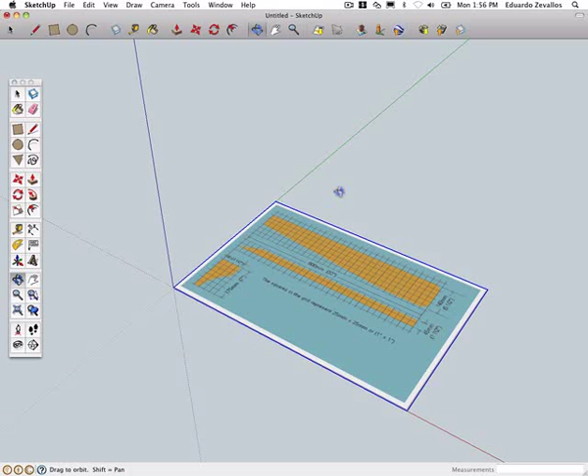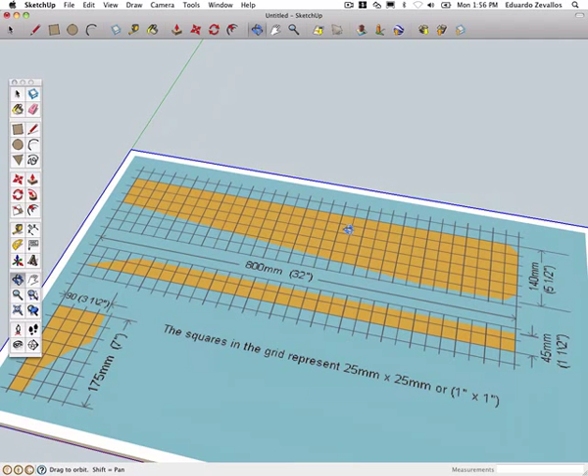Back to another fun and exciting benchmark here at SCIS Middle School, Design Technology, and we are looking at benchmark 3, part H and F, or the arm and the arm supports. Here's the arm, and here's the support. So now, if you look at this, this is just the top-down look of the arm, and here is the side look of the arm.

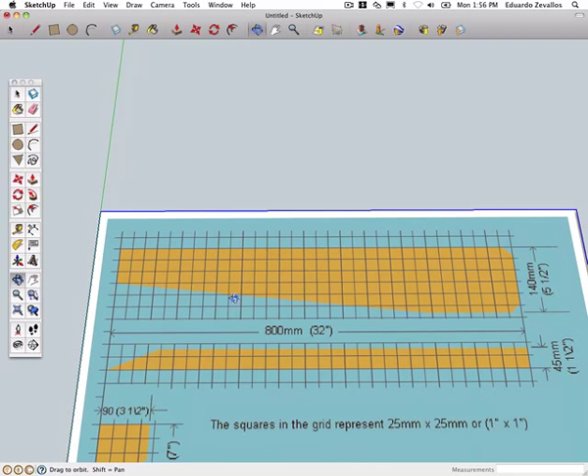I think it's important for us to model this after the top-down, and the first thing we're going to do is to size this correctly. If you recall from the small discrepancies that we encountered in previous benchmarks, we want to be able to resize this model according to which the length or the width needs to be more accurate. Sophie, the length, correct. So I'm going to use my tape measure tool, scroll down here to about this point until it's about right there in the center.

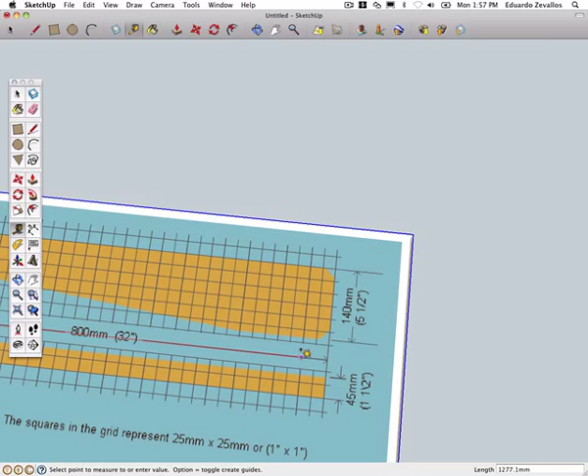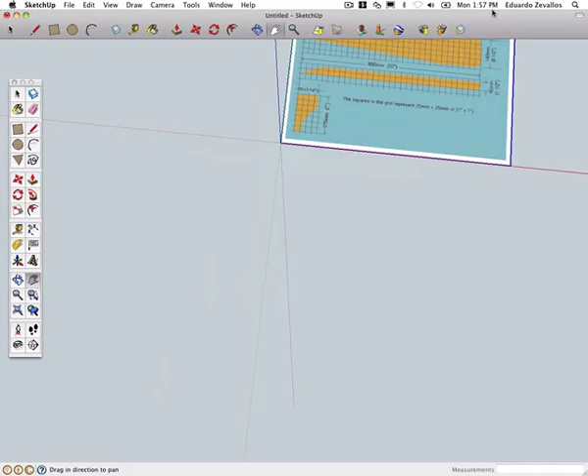Click once, and I'm going to move this all the way over here to this point, scroll in, about into the center, click, and it's going to ask me which value I want to resize to, and the value is 800 millimeters, and press enter. Do you want to resize the model? Yes, we want to resize that model. Very good. Now, take a look here. That model is now resized, and we are ready to begin.

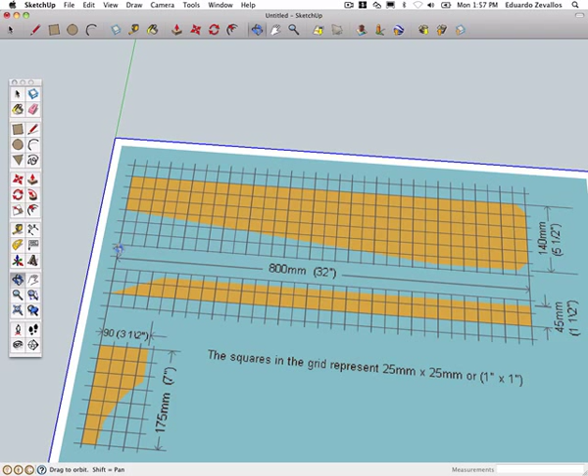Like I said before, we probably want to start here, but before we start this process, I want to go ahead and change my axis. Who can tell me, where should my axis be placed? Carl! Right there, like down. Here? Yeah, that's a place we can put one. Where else? Like the opposite one. Here? Yeah. I honestly think this is a better place, only because it allows us to really use the straight lines here for this point, whereas this one kind of curves straight out. So I'm going to make my axis, zoom in on this area.

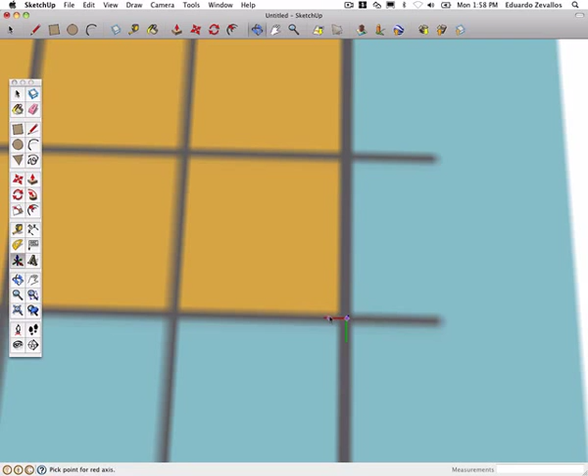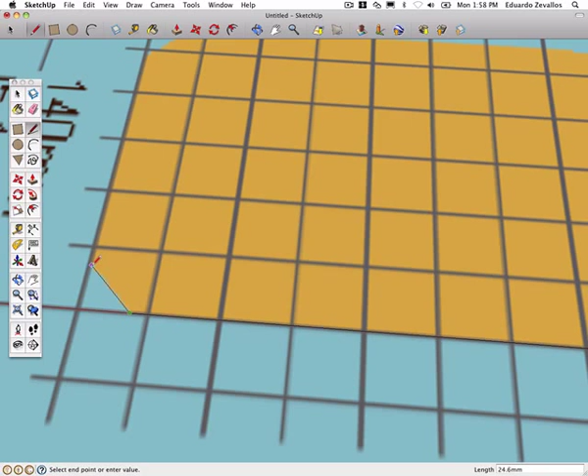Click once, draw my red. Actually, I don't really like that point for the axis because I want to get it into a nice sort of, here we go. That's about right. So put my red, put my green, and my blue comes up pretty nicely. That looks pretty decent, if I may say so myself. And now we start the process of building. Snap, snap-a-roo. See, that follows a beautiful green axis.

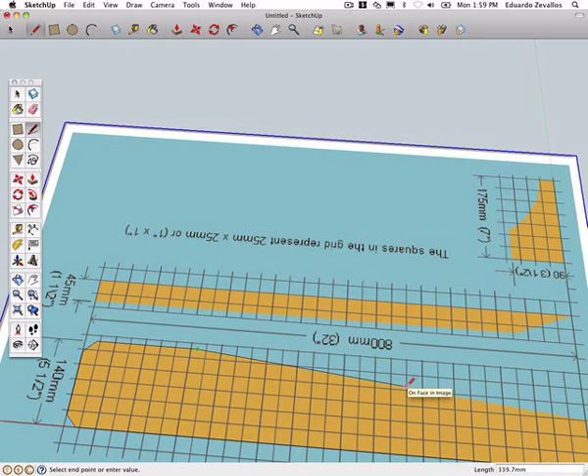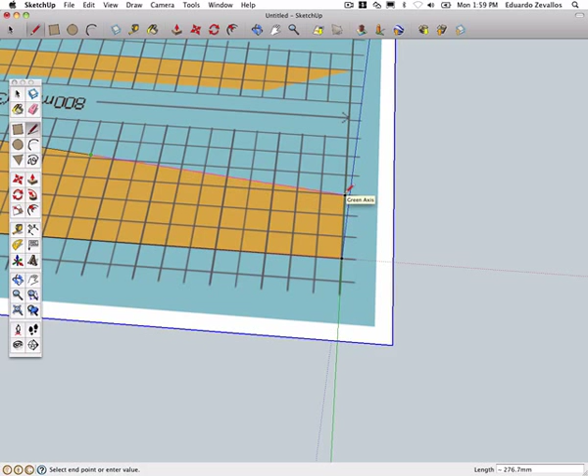Boom. Now this looks like it curves slightly, doesn't it? But I think it's better if we just stick to sort of tangential lines here. Like here. And it finishes off pretty nicely, I think. And I'm just going to hover over this to infer that line. See? Never want to leave anything up to chance. And there we have it.

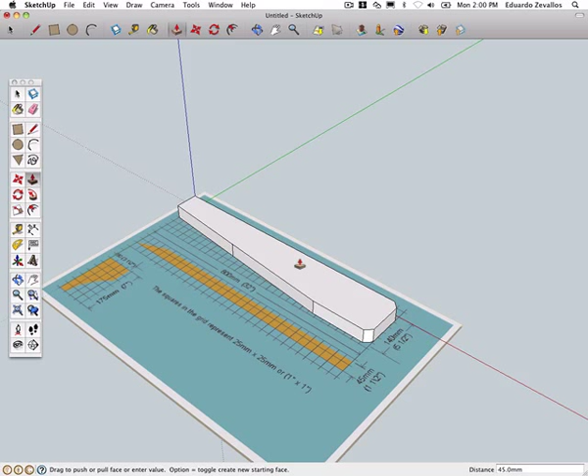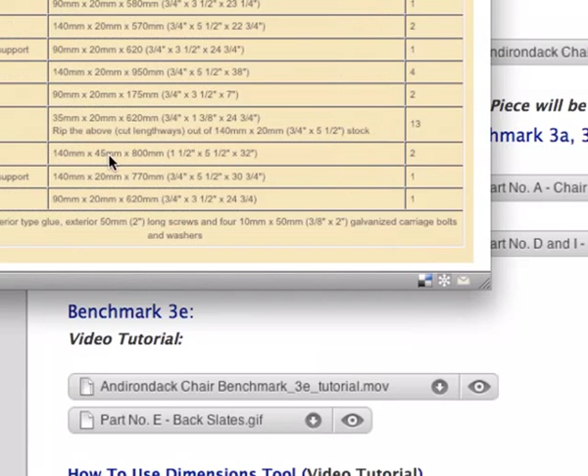Now, this has to raise, if you look at this side view, 44 millimeters up, 45 millimeters. That is a pretty thick arm. Are we right on this? I think it might not be very flat. I think it's the width. Yeah, I think it's the width. Are we right here? I don't know. Won't it say on the... It should, yes, you're right. When all else fails, let's go back to our measurements. And the arm says 45 millimeters in height. Yeah, that's a pretty big arm, if you ask me.

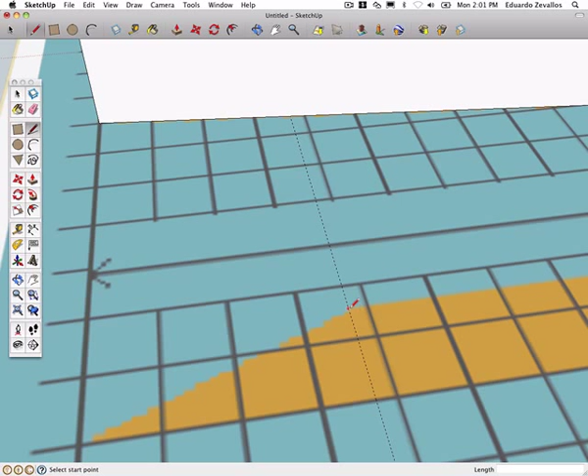But now we can see that we need to cut out a groove here about this line, and we'll measure it from the point here. In fact, what we can do is just draw a quick little, actually, I think the measuring tape is a good idea. I'm just going to measure it from here to this point there, then take my pencil, let it snap on this line, where are you? Or maybe that's not a good idea. Maybe snap it here to there, and there to there, and that length is about 100 millimeters. See? 100 millimeters.

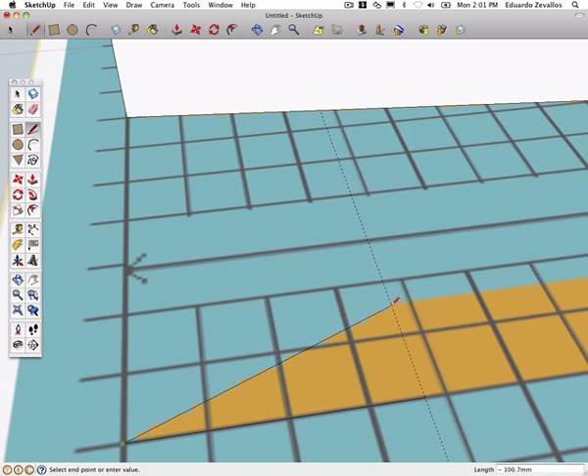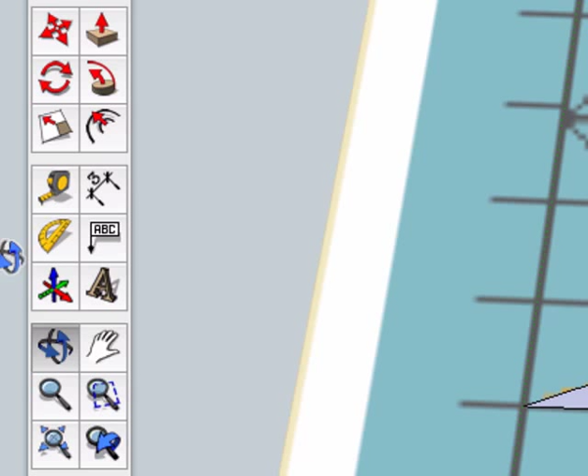But we also have to consider the angle here. What is the angle? And how can we find that angle? What tool do you need in your tools here to find the angle? The what? That's close. It does have sort of a protractor, but you're looking for the actual protractor. Do you guys even use protractors anymore? Where is it? Scale? Tape? Ah, the old trusty protractor.

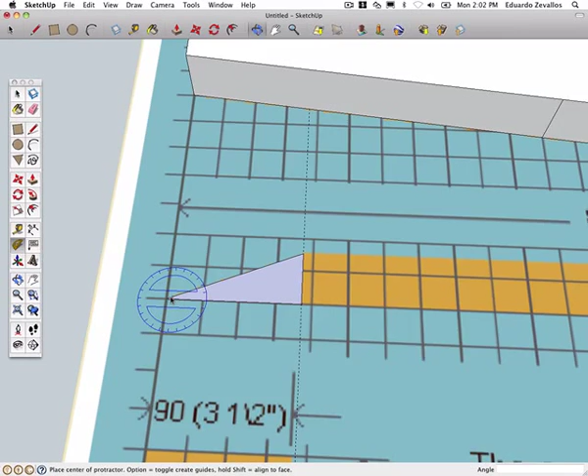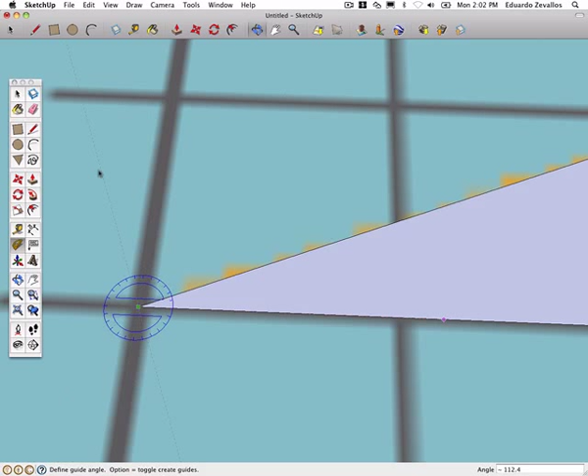Click on Mr. Protractor. Click once to anchor that point. Click one more, and we're going to raise that protractor until it tells us it is about 22.5 degrees. It could potentially be many more degrees, but this is 22.5 degrees. So, knowing that information, let us go back over here. Start from this point here.

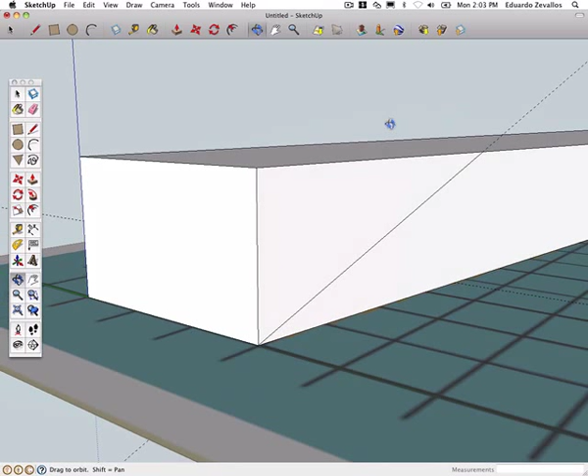Protractor. Click to anchor. One, raise 22.5. Enter. Did someone say Monet? Now, that's just a protractor line. Doesn't affect anything, but if I click using my pencil there, follow that to the intersection point there, and I draw a fine line right around here, and I can then push-pull that out.

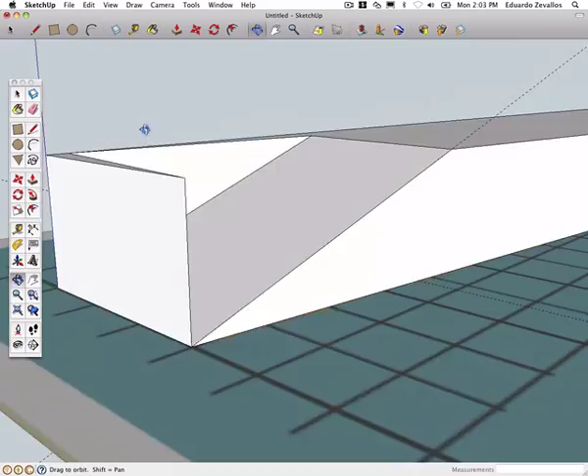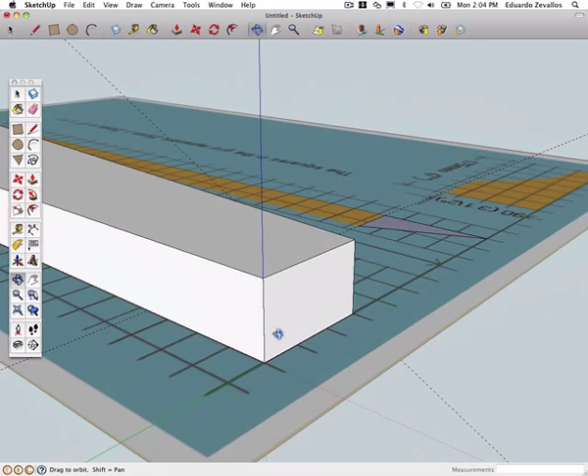But look what happens. Does anyone know why this happens? Because you're on the wrong side. Yeah, that's one reason, I could have done it on the wrong side, but why else? I think if I was to do it on the other side, I might have gotten a similar problem as well. Yes? It's not a complete square anymore. If you remember, we cut this at an angle now. So even at this angle, it may not come out the way we want it to come out. So let's try the other side, like Kai was saying, and see if that will make a difference, or if we run into a similar problem.

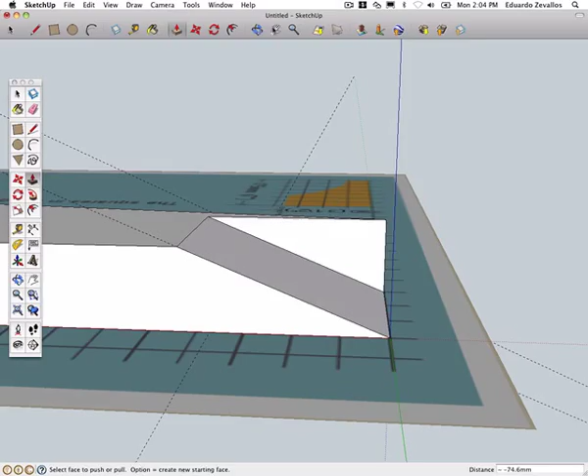Let's go here. Click, click, and 22.5. Let's draw the line there to the intersection and push-pull this out. But you see, again, we don't get that perfect sort of thing. So we have to be smart about this. How are we going to be smart about it? What do you think we need to do? Suggestions.

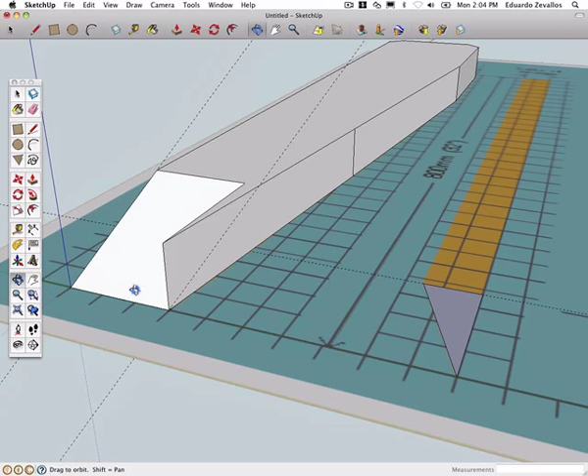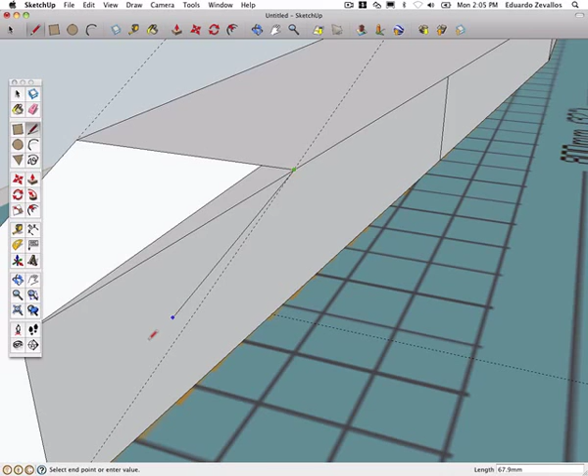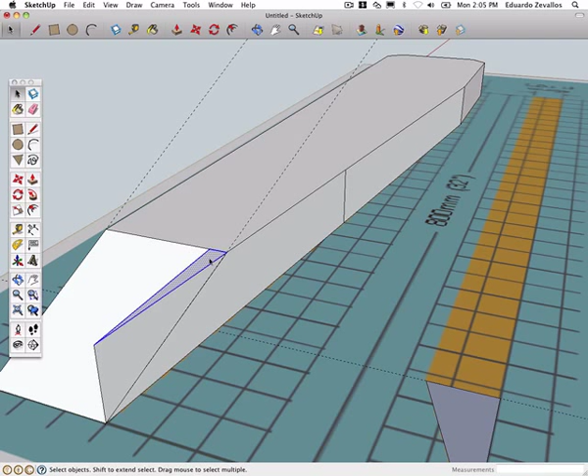We can try to finish this. But that doesn't really work so well, does it? We can try cutting it out. That's right. Selecting individual faces. But then look what happens there. You erase the top portion. Right. We can do that. No, but you know what? Not a big deal, because essentially, what's missing here? That line, right? Very good, Daniel-san. Very good.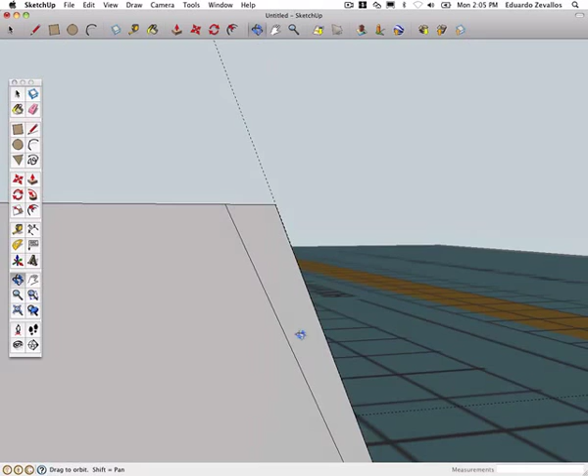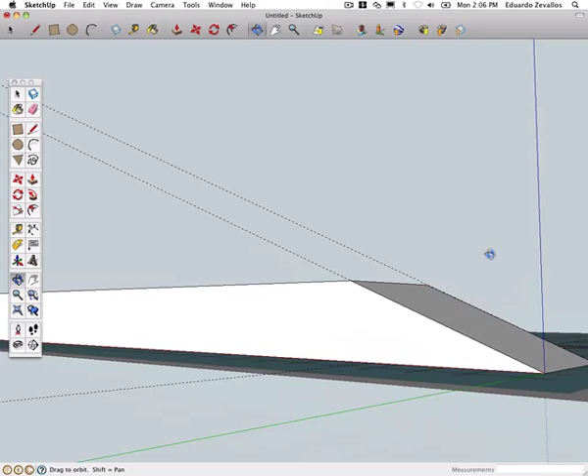Just remember back from that old video that we saw before that talked about what you need in order to create a shape. You need to complete. What we did here is that we healed, H-E-A-L-E-D, healed this object because we had taken away one line, but then we healed it again. You guys get it? Healing? Anyway, there we have it. We have our arm and we're ready to go. And all we got to do now is create the strut or this support.

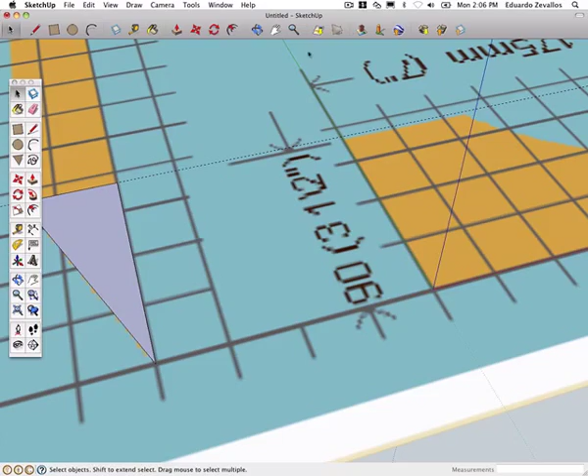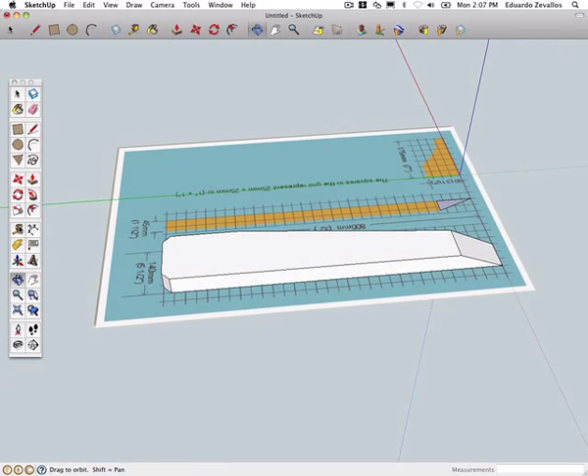Again, I probably want to take my line and turn it the other way this time. And then go about creating my back support there. And this gets raised, I think, 22. When you're finished, you probably want to get rid of all your little measurement lines. Then use your dimension tool. Probably focus it over here this time because this is a nice little angle. Here, there to about there. Click. That looks kind of weird. Yeah, there we go. And that should be 800.3. That is pretty good, at least under there.

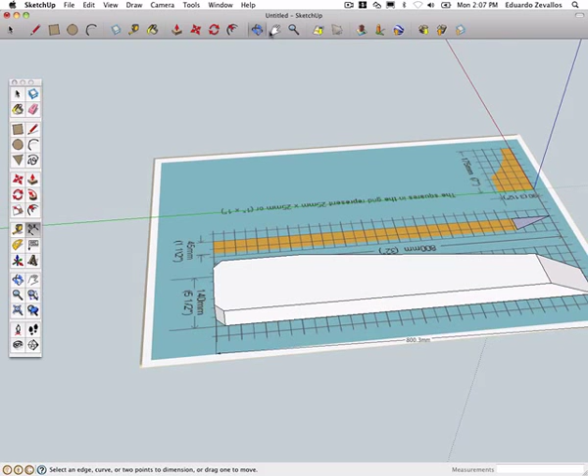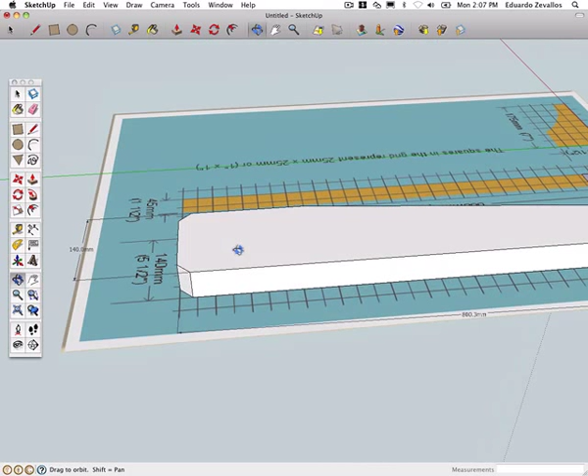And then we do it on this side. Measurement tool, I'll probably start it from this point here to there. Move that out that way. And you can see that I have my measurements there, and I would do the same over there, so that I can have nice measurements. And if you want to be really cool, you could also do the measurements from the top here and move that out over there. So that I got my cool measurements ready to go, and you could show it off to me and to everybody else. Components. Oh, that's right.

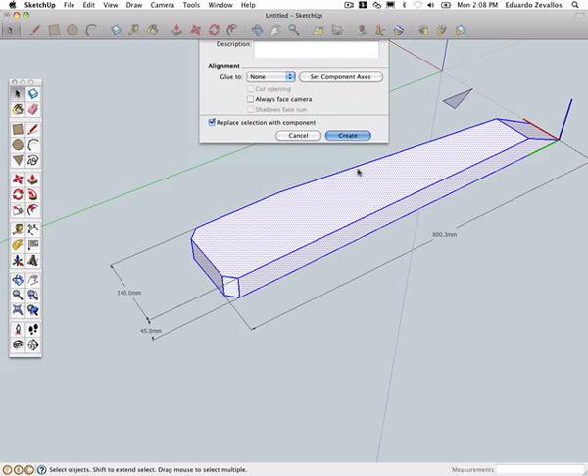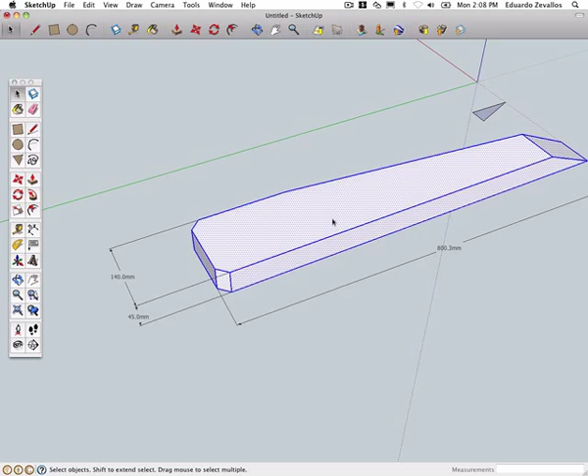Oh my goodness. Thank you, Sophie. Make this a component. This is called the chair arm. Create, and then add my little label, my little labelicious, and that looks about right. What happened to my measurements? I have no idea. You made them when you were next to the... Yeah, there we go. You saw that little triangle on the back. Don't worry about that triangle. Just change the name. Make component, chair arm.

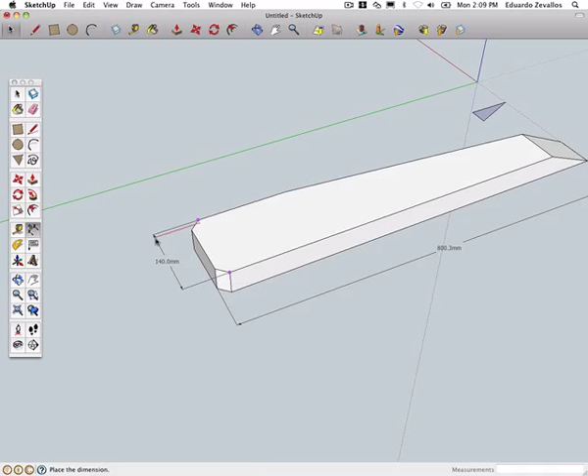Oh, you know what happened? Because the component squeezes everything onto it, it will squeeze the measurements, because I made the measurements according to that. But that's okay. We can just delete the measurements and then redo them again without a big deal. Just make them outside of the component this time. And there you go. Then we add a little label. And you take a picture. And then you do the same for the other one. Questions, comments, concerns? All right. Enjoy.